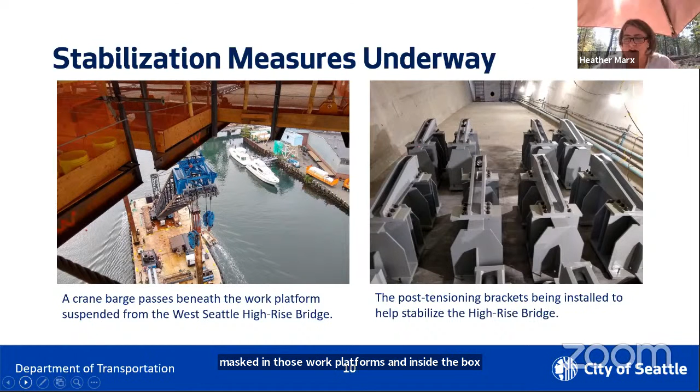We've also been very busy on traffic mitigation and Reconnect West Seattle. We've installed radar speed signs on Sylvan, West Marginal, Olson Place, and Airport Way, and next up will be Southwest Roxbury Street, covering many of the important detour routes to give feedback on speed. We've done signal improvements at the Michigan and Corson signal, and restriped the West Marginal Way and West Highland Parkway intersection, which I hope is working better for folks. Mayor Nickels, I understand you have a question about a restricted right turn signal, and we're working with our signal engineers.

There may be some infrastructure problems there that might take a little longer to address. We've also done some vegetation maintenance along the West Seattle Bridge Trail, which means we've cut back the blackberries. We've also repaved 7 panels in the vicinity of 32nd Avenue Southwest and Barton. I can tell you from my experience that it certainly needed it.

We've also completed a neighborhood focus group home zone walk with South Park, on October 5th. And we are scheduling those same lovely socially distanced walks with Highland Park and Georgetown so that we can have some plans from our home zone program.

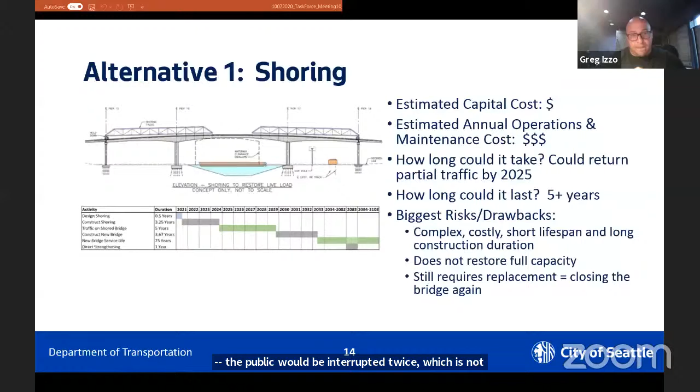Okay, this is alternative 2. This was the baseline alternative that we compared all the other alternatives to. As we get down to the attributes and performance ratings, I'll go through that.

This alternative came in as, obviously, the least cost alternative for repair and the least cost alternative overall. It is the least cost; however, it does have one of the highest O&M costs over the service life compared to the other options.

So as we look at the overall ownership costs, including capital and operations and maintenance, it comes pretty close at the end to being even close to the replacement options. So even though it has a very low upfront capital cost, the O&M costs are high, and so the overall cycle at the end comes pretty close to the replacement alternative.

So we're going to have to figure out what the gain is of that, using O&M money versus capital money, and some of the advantages and drawbacks of each.

How long could it take? This is probably the quickest way to get traffic back on the bridge, perhaps by mid-2022. That would include immediately mobilizing, perhaps getting out a GCCM contract, using some alternative delivery to get this design, get a contractor, and restore a live load. So it would be the quickest option.

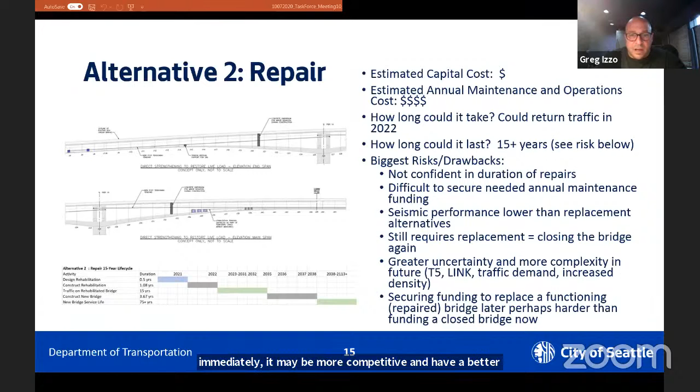Alternative 3, next slide, please.

There may not be a slide here, because alternative 3 was a partial replacement alternative of replacing the midspan. However, due to the technical complexities of the connections themselves, there was too high a risk to consider continuing that alternative through. Given those connections, we decided to take it out of the alternatives, as it could be something that wouldn't work out down the road as we get deeper into design.

Also, it was not the cheapest alternative for replacement, so that was another reason as we look to alternative 4. Alternative 3, given its complexity, didn't end up the least cost option, and it ended up being the most risky as far as a technical repair. So we decided to take that out.

Alternative 4, in the middle of the pack I'll say, as far as capital cost compared to alternative 2, which had a low capital cost and high O&M. This has a middle-of-the-road capital cost compared to all six alternatives, and a lower O&M cost because it's a newer asset. The initial two years we'd expect a slightly higher O&M cost, but after that it would tail off significantly because it's a new structure, and we expect to spend much less on O&M over the complete life cycle.

Greg, I think the cost is three stars, and O&M is 2 on alternative 4. Yes, so like I said, the capital cost for this alternative is in the middle. It's less than alternative 5, obviously the replacement in the bore tunnel or tube tunnel, but it's more than alternative 2. So it's in the middle of the pack as far as capital costs. However, the O&M cost would be less than we'd expect out of alternatives 1 and 2.

And we lost our, I don't know, no longer see the PowerPoint slide. That wasn't on purpose, Greg. Megan's reloading it, there was a rendering problem. I want to make sure I have... oh yeah, I do, okay good, it's working. Sorry, for a while my microphone wasn't working, my apologies.

So there are some risks that come along with alternative 4. Obviously, when we remove the superstructure itself, it presents an opportunity, and then we have to go through a process and permitting with the U.S. Coast Guard, what's called a navigation impact report, which evaluates whether or not we have to increase the clearance on a bridge because we're basically removing the bridge, and it provides an opportunity to evaluate what we need to put back. So there is a risk that we'll just have to go through the process.

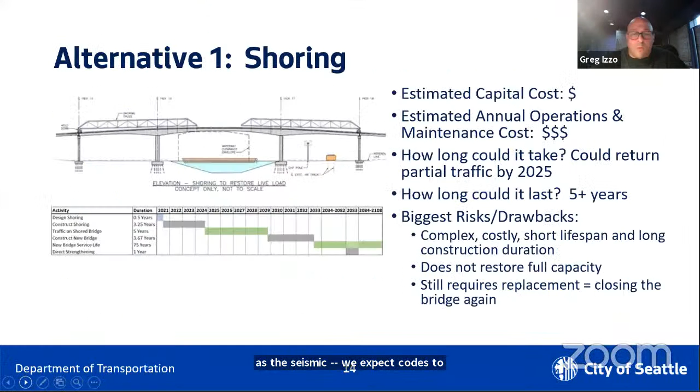We expect codes to change over the next few years, influencing what we do as far as foundation strengthening, but that would add a cost to this alternative that we would have to manage and either mitigate now or mitigate later. And again, this bridge's service life was 50 plus, but we're saying 75. Some of this depends on what we do for foundation strengthening.

Another thing I want to point out between alternatives 2 and 4 is that we're doing post-tensioning right now as part of alternative 2. This alternative, along with the replacement alternatives, would need future strengthening after year 50. So there would be an ability or requirement to come back and do some strengthening to this structure after 50 years of service. The biggest drawback, obviously, is it's going to take longer.

It's going to be a longer closure to replace the superstructure than, say, alternative 2. But it should still be quicker or along the same timeline as alternative 5. We hope to be quicker because it is less scope, however, that's something we're still evaluating. Securing funding, it's a large sum of money we're talking about here, and if we accelerate the schedule, there's going to be an expectation to produce funding to pay our contractors. So there's going to be a trade-off we have to work through as far as funding for this alternative and how quickly we can start construction.

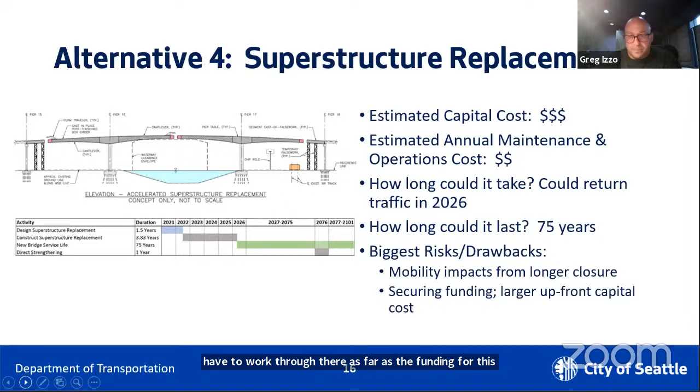Alternative 5, next slide please. Alternative 5 includes the full replacement, and for this alternative we've chosen to select the cable stayed bridge. This was the least cost alternative that made it for the full replacement option.

The estimated cost is obviously higher than all the others, with exception to the tunnel option, the immersed tube tunnel. This is the highest capital cost option. But the long-term O&M for this alternative would be relatively low compared to the repair options. So the overall life cycle, again with exception to the tunnel, the overall ownership cost to the owner would be slightly higher for this alternative than for alternative 4.

How long could it take? Again, this would be roughly on the same timeline as alternative 4, where right now in our traditional delivery methods we'd have traffic back on the bridge. However, we're looking at alternative delivery that would likely accelerate that schedule a bit. We just need to figure out what that would be through alternative delivery methods. Costs and risks of this one are obviously a longer closure.

There would be new piers, meaning new ground we have to rip up and deal with some right-of-way issues. So there's risk there. It's a steel bridge, so there are a lot of steel components which take a long time for procurement and fabrication. So there's a length we have to manage as far as the fabrication itself. Steel has a lot of pros to it, including the strength to weight ratio. However, it does take longer to fabricate, and a lot of it has to be done off-site.

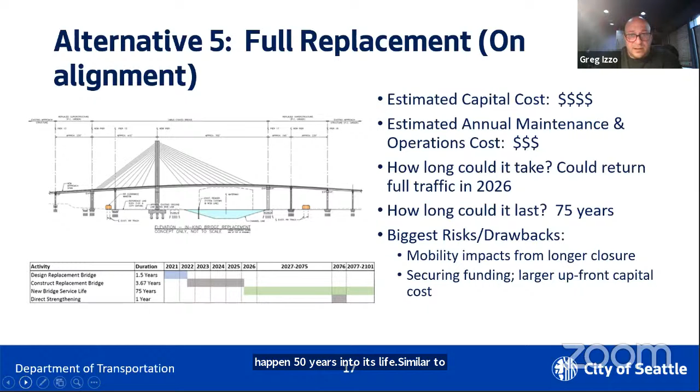Alternative 6. Alternative 6 is the immersed tube tunnel. For now, as part of the CBA, we've decided to assume the tube tunnel would be on the north side of the bridge, although the south side is still an option we may want to consider to avoid impacts to, say, the port and the railroads. But for now, we've evaluated this on the north side of the bridge.

This obviously has the highest capital cost, quite a bit higher than even alternative 5, and that is primarily due to the monetized risks. There are a lot of risks associated with an immersed tube tunnel option, not only going underneath the waterway, but also the cut and cover sections of the bridge that would have to happen over the island, and some of the interesting things we could come across as we excavate a lot of earthwork and dig through the island there.

But overall, connections to the existing structure, groundwater risks, and cost that we would have to factor in here. So overall capital cost, this is a much higher capital cost than all the other alternatives, and brings along probably most of the risk as well.

The maintenance cost of this, given the amount of HVAC, electrical, and mechanical systems that go into an immersed tube tunnel, the operation and maintenance cost of this alternative will be quite high. And it's an asset that we are not familiar with. We don't have a lot of experience with it.

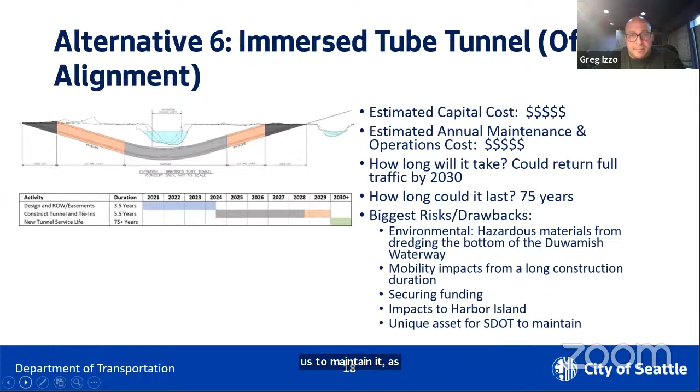So that's alternative 6. I'd like to move on to the summary to go over some of the attribute performance. This is a really cool visual graph where we can check out how the attributes performed.

Just to remind everybody, when we did attribute weighting, the CTF weighted seismic, constructability, and mobility as the order of priority attributes for the exercise. Overall, that really closely matched the combined attribute scoring, which was mobility, seismic, and constructability. So the attributes were the same, though they may have been prioritized a bit differently between the combined and what the CTF came up with.

As you can see on the chart here, alternative 2 has all half circles filled, because it was the baseline. We chose alternative 2 as the baseline performance alternative, so all the other alternatives were evaluated against it. If we look at this graph, the more filled in the circles are, the more that alternative was chosen over alternative 2.

Alternative 4, bridge maintenance, had a fully filled-in circle, which meant that attribute performed the best for alternative 4 as compared to alternative 2.

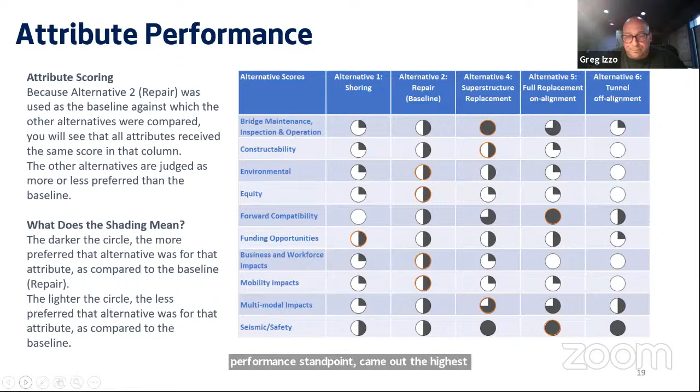All right. Okay, that covers it. Thanks so much, Greg.

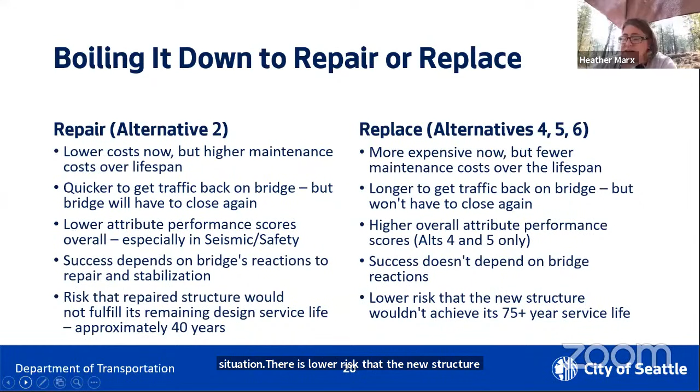Key takeaways are that there are significant concerns that remain about the ability of the repairs to last 40, 15, or even 5 years. We just don't know, and that means another unplanned closure is a real possibility. I think we can all agree that would be a bad thing.

All the pathways require funding partnership, and our experience tells us that replacement alternatives require more funding upfront, while repair alternatives require maintenance costs that build up over time. Those are often things folks don't want to partner on. A replacement would be required at some point, and there are no guarantees that the process is going to get any easier. The urban environment just gets more and more complicated when things like Terminal 5 are fully functioning and there's an existing light rail bridge.